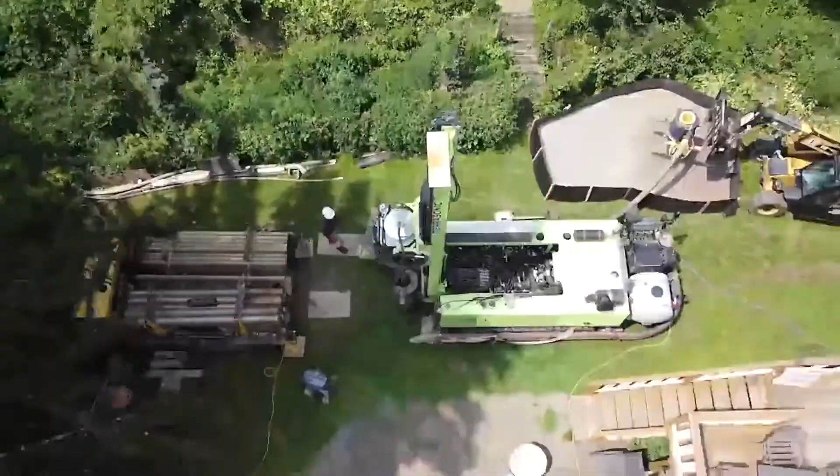Everybody, all right, we're back. Last but not least, with Sage Geosystems. So we're on our last startup. Sage has been in the field over the last year in South Texas, a sedimentary demonstration.

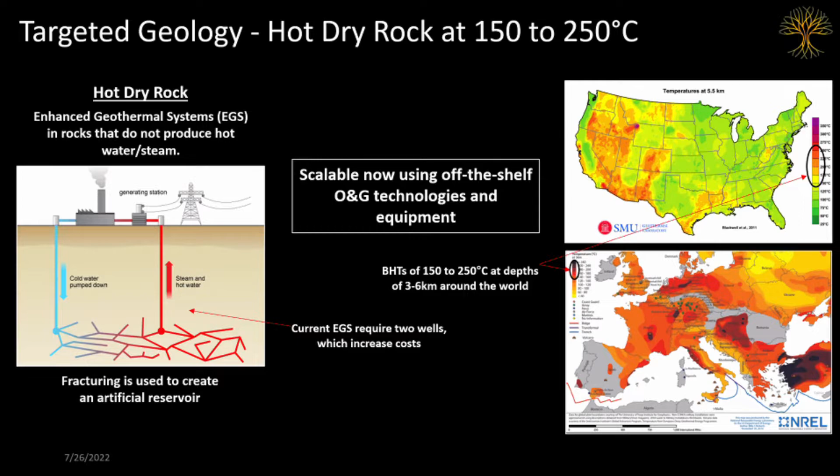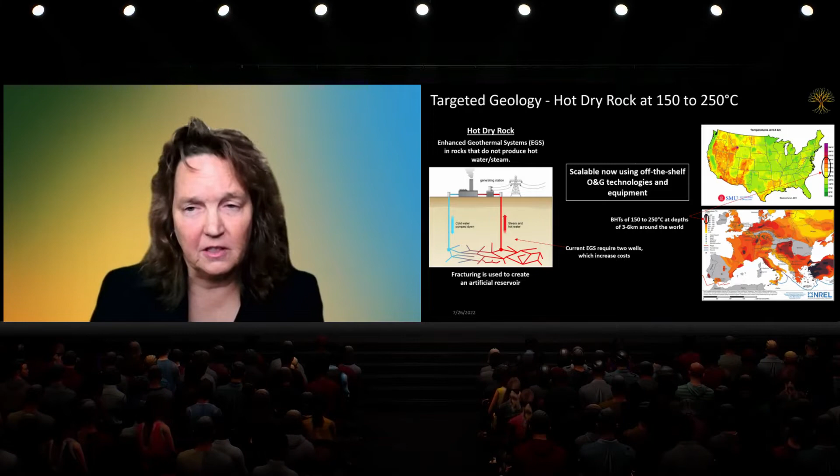So Sage is focused on making geothermal commercial in bottom hole temperatures between 150 and 250 degrees C, because we want to use existing oil and gas equipment and technologies, and we also want to scale geothermal now. So our EGS design for hot, dry rock also utilizes just one well, and that's in order to reduce the well cost and the overall plant cost. And also, we think it will mitigate induced seismicity by limiting the lateral extent of the fractures.

As I mentioned, we re-entered an abandoned gas well in Starr County, Texas, that was drilled in 2008. It was considered a dry hole, so the last string of casing was not run, which left us 9 5/8 inch casing in the hole, which was ideal for our test. Geothermal, as you know, needs large casing sizes. So we are working between depths of 7,920 feet and 11,140 feet. And the maximum bottom hole temperature at the 11,140 feet was 150 C.

So our intent was to create a 350-foot vertical fracture, but we were actually able to connect nearly 10 times that. So we were able to connect 3,200 feet in that vertical fracture, which is almost a kilometer. And we see this as a huge win for geothermal. So after connecting this fracture, we then performed a series of circulation and pump-in tests across both the 3,200-foot vertical fracture that we had created, but we also shortened that fracture and did some tests across a 600-foot section of the fracture. Basically, we set a bridge plug and perforated at 8,550 feet.

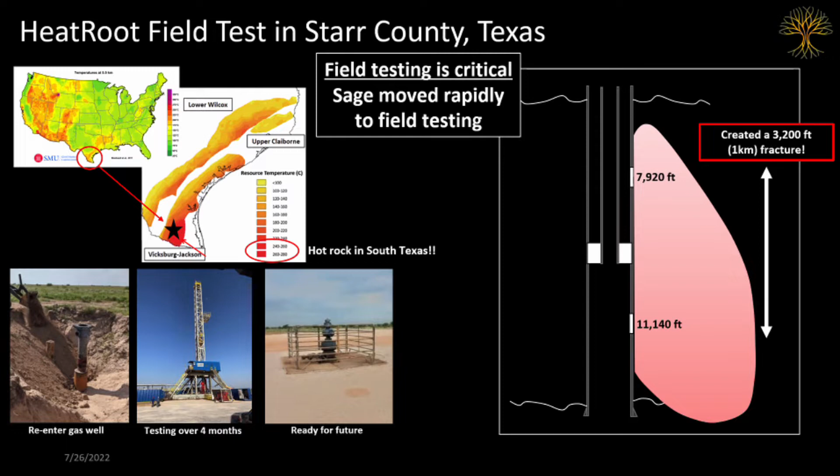All right, so after connecting the fracture, we then performed both circulation and pump and flowback tests across the 3,200-foot vertical fracture, and then again, as I mentioned, across a shorter 600-foot fracture.

So in other words, whatever flow rate we were pumping in, we were wanting to get that same flow rate out. So if we pumped in 7 barrels a minute, we were getting 5 barrels a minute out, as an example. And our conclusion is, because this vertical fracture extended actually across two sands, the Yegua and the Vicksburg transition sand, we think we weren't able to achieve steady state because there's a big difference in the frac gradient between the top of the fracture and the bottom of the fracture.

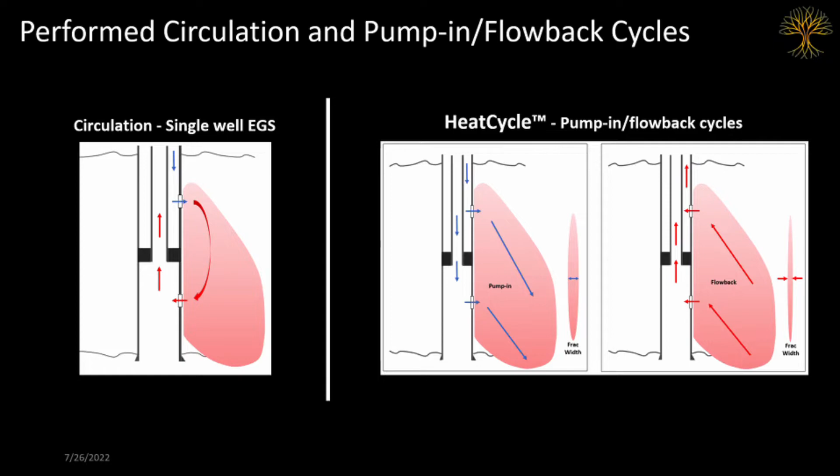We call this HeatCycle, but we have a lot of people that have termed it aqualung. And I think aqualung actually provides a great visual description for what we're doing. Basically pumping fluid in, expanding that lung, holding your breath, and then letting that fluid come back out. So these tests produced very successful results, and they really point, in our opinion, to a huge opportunity in the geothermal space.

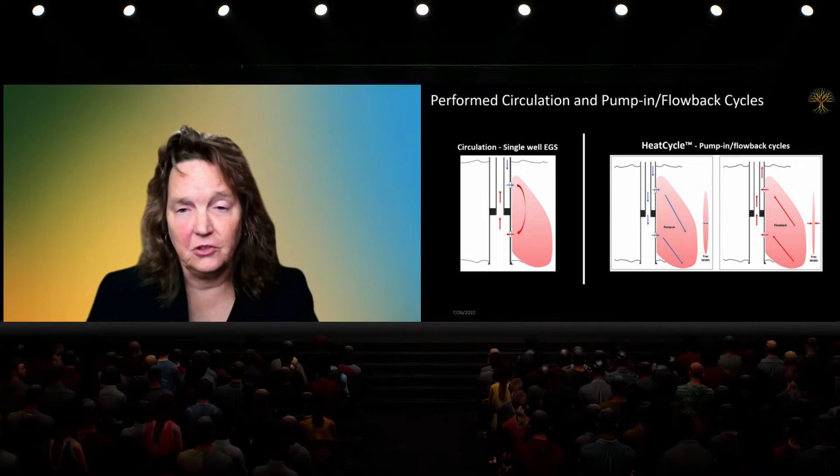So basically, to reduce the frac gradient delta, I talked about having a 600-foot frac length. So we plugged back, created a 600-foot frac length that reduced the delta between the frac gradients at the top and the bottom, and then we did some circulating through there as well.

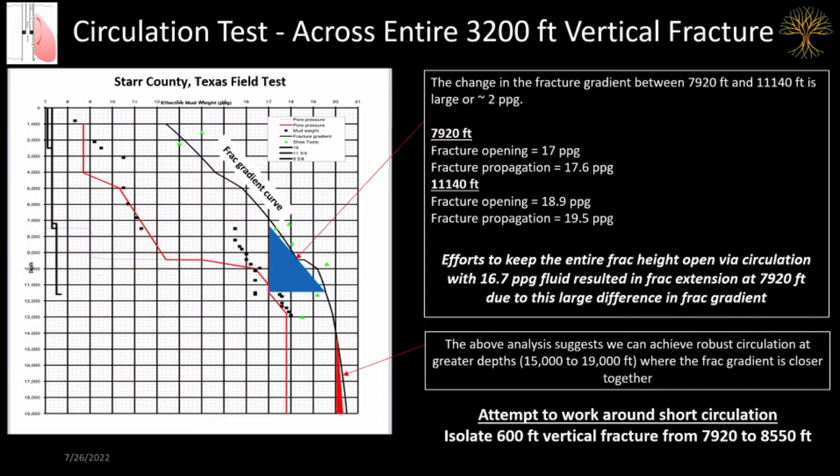So some general observations from this test were that, first of all, we were able to circulate across the entire 600-foot frac, but we still were experiencing some short circuiting, or the inability to get returns to equal the rate pumped into the fracture. However, we were actually able to get better returns across the 600-foot frac than we did across the 3,200-foot frac. So shortening it did help.

Circulating down the annulus, entering the frac from the top gave us about 70 to 90% returns, while if you were circulating down the drill pipe, entering the frac from the bottom, you were getting less than about 30% returns. And we think that's because not only did you have friction working against you, but you had gravity working against you while you were trying to pump up the fracture.

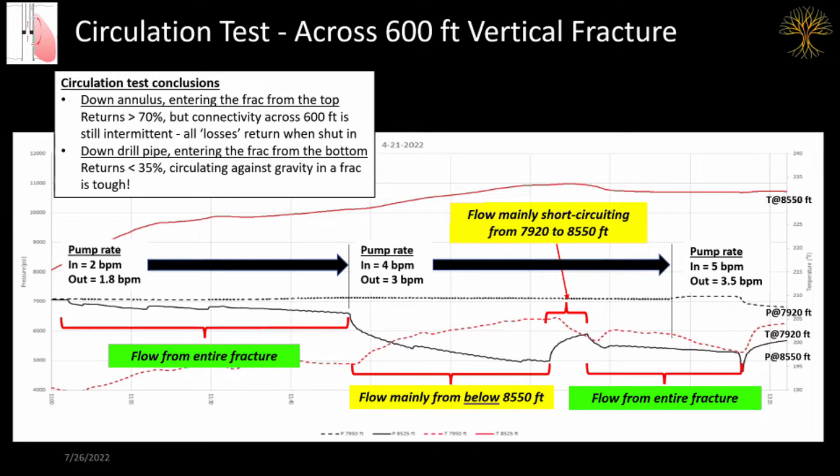One of the other things we recognize is that we were not filling the fracture during the circulation test. So we also think that helped to contribute to the short circuiting. And then another observation is that we could readily open and close the fracture network, and the fracs really open and close at very predictable pressure.

So our reflection was, after 30, 35, 36 years in the oil and gas industry, we never really did work fractures like this in the oil and gas industry because we didn't have to. We would frack a well, put proppant in it, and leave it alone. But anyway, we were able to see how the fractures would work when you open and close them, and that the opening pressures were quite predictable.

One other thing is, because we were working with vertical fractures, we were taking more measurements in the vertical plane. There are a lot of oil and gas experiments being done, but most of the measurements are being taken in the horizontal plane. So our final observation was that the injection and production points actually start to behave a bit independently, which, as we know, is counterproductive for EGS.

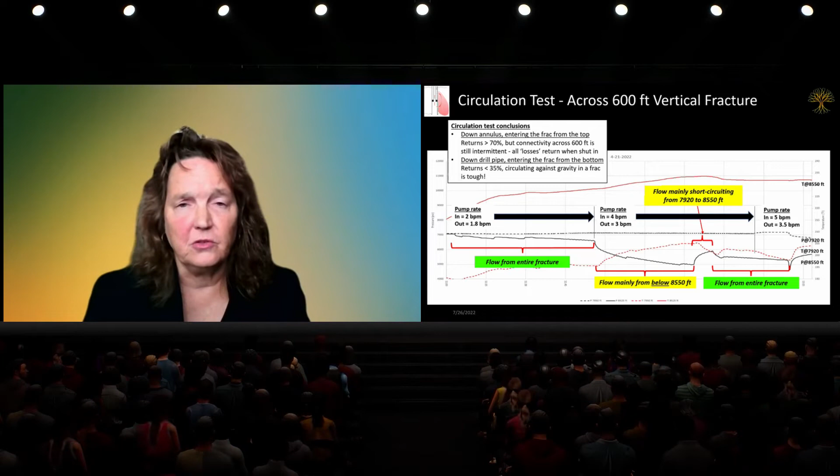So that was an overview of our circulation tests. So our next series of tests, as I mentioned, were these pump-in flowback tests, which we call heat cycle. So before we started the heat cycle test, we first pumped a 500 barrel pad of fluid into the frac to basically load the frac. And then we cycled, as you can see on the graph, several 50 and 100 barrel volumes into that fracture by pumping in and flowing back.

I mentioned we would pump in, shut in for different periods of times, and flow back. So some of our observations here was, for each cycle, we are actually able to flow back all of the fluid that we put into the fracture, which in circulation, we didn't get all the fluid back as we were circulating, but if we ever shut down and allowed that fluid to come back, it would all come back.

Regardless of the length of time that we shut down between injection and flow back, we actually did not see a large difference in the temperature of the fluid that we flowed back. And we concluded that the fluid was actually flipping. So as the cold, more dense fluid was pumped in, it would travel down the fracture and then push the hot, less dense fluid up the fracture. And that's what would get pushed out. And that's what we were measuring. And we did some modeling on that, and our modeling has confirmed this flipping phenomena in the fracture.

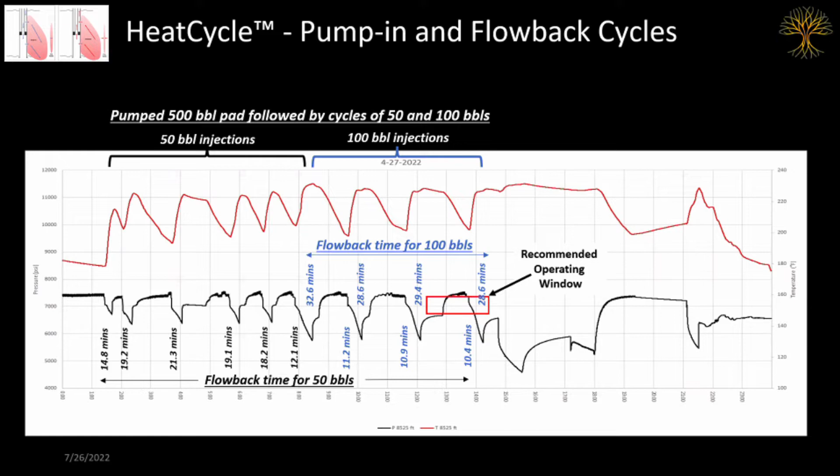To keep the injection and production points in sync and to be able to consistently flow back all the fluid that we pumped in, we needed to operate within the window that's shown in red, that box, which is basically above fracture opening pressure, but below fracture extension pressure. We feel like if we operate within that window, which is about an 800 PSI window for this particular test, then we can adjust our volumes, we can adjust our rates. There's a lot of flexibility, but that was the operating window that we wanted and needed to be in.

Our last critical observation that I'd like to mention is that when we were doing the pump and flowback test at the 11,140 foot depth, which is a tight mudstone, we saw little or no leak off. So on the plot, you can see the pressure immediately increases about 40 PSI when we shut in. And that's because basically the fluid is being trapped, it's being heated, and it starts to expand. So our conclusion was this was a very low permeability formation, little or no leak off.

And this type of formation would actually enable us in the future to use refrigerants instead of water in the fracture, because you don't have to worry about a massive leak off and then a massive loss of a very expensive fluid. And if we're able to do that, we can eliminate the need for the heat exchanger and increase the overall efficiency of just generating more electricity with our power plant.

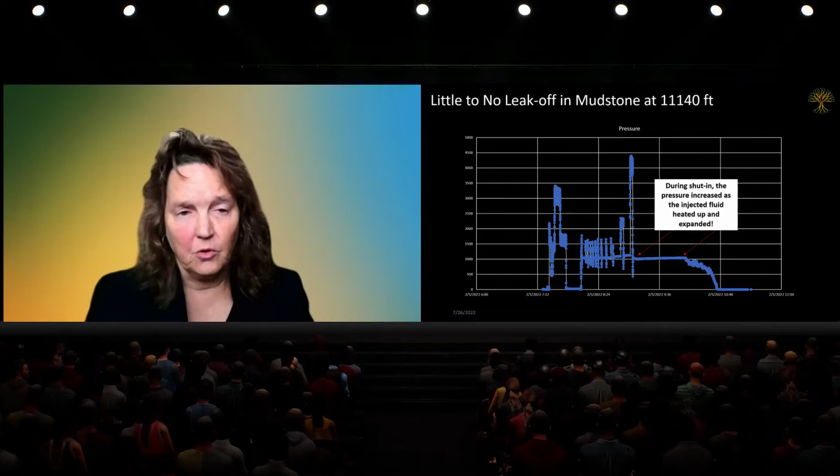All right, so we are still examining and modeling the over 4 months of data from our Starr County field test, but here are the conclusions so far. First, a single well EGS is easily created, and it will result in reduced costs because it's a one well system versus a doublet. We can confidently connect a vertical fracture at the bottom of a well with our HeatRoot downward oriented fracturing technology. A reliable connection across the fracture is greatly improved if we operate above frac opening pressure. Recall the red box on the slide two back, because it doesn't allow the fracture to close. So that's really where you want to be operating.

Short circuiting during attempts to circulate across the fracture can actually be solved by cycling the fracture with the pump in flow back method that we call heat cycle. So you get around short circuiting by just doing heat cycle. And then I mentioned just last, targeting low permeability formations allows the use of more expensive refrigerants, and therefore we can get a higher net power generation if we're able to do that.

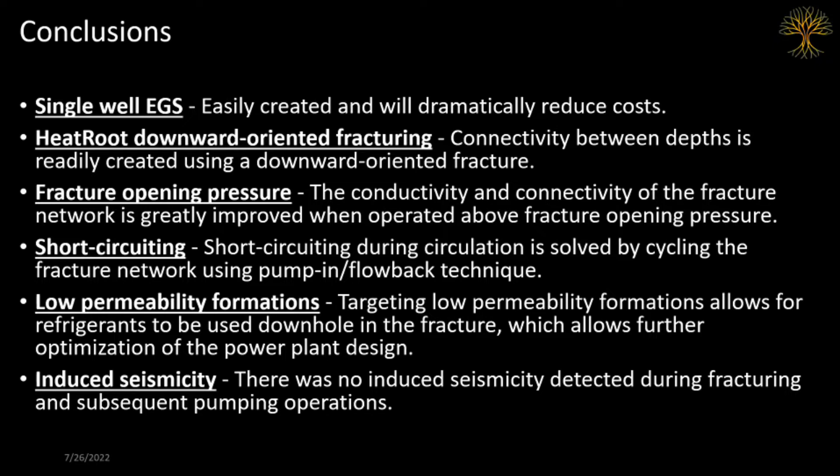And the last thing I want to mention is we had 4 induced seismicity monitoring stations that we worked with the University of Texas Bureau of Economic Geology to install. And they helped us to evaluate the data. So in the 4-month period where we were fracking, where we were circulating, we saw no earthquake events or no induced seismicity events. So we thought it was very successful in that regard.